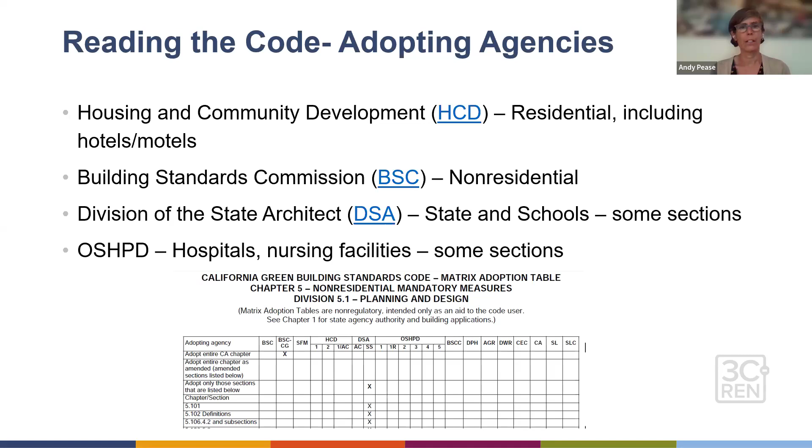CALGreen itself is organized by administration. Definitions are a good reference—they keep those really current. The scope is important as well, we'll touch on that. And then otherwise, the main content is Chapter 4 for residential, Chapter 5 for non-residential. Some more resources, and then the tiers—those reach sections are in the appendices.

So the scope, just so we're making sure we're not doing more or less than what is required: in the residential, all new construction that's residential needs to comply with CALGreen. If you're doing alterations or an addition that adds area or volume, that new part of the construction needs to also be CALGreen compliant. So if you're just messing around on the interior, it doesn't really matter, but if you're adding height or square footage, that does matter. And it only applies to the new work you're doing, unless there's something else in the code that triggers it.

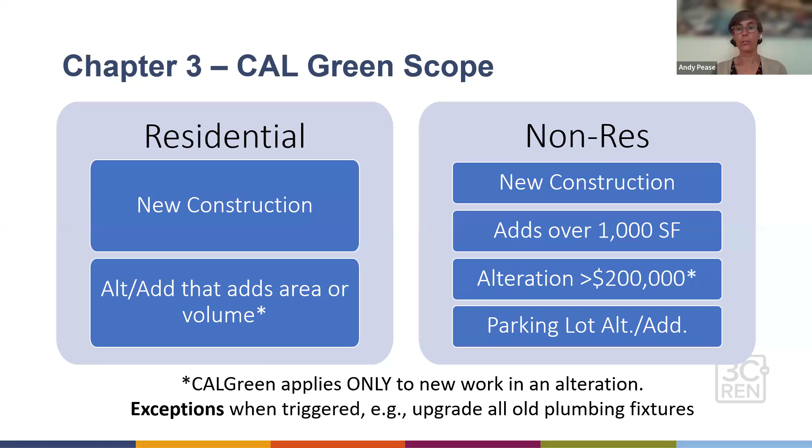And then mixed use, mixed occupancy—each section needs to meet that requirement. It's a little bit tricky if you're doing, say, hotel motels, which are in the residential section. So if you're doing that on a podium with retail down below, then that will need both a residential checklist and a non-residential checklist on your building plan. So you have to comply with both depending on that section. But if you're doing multifamily housing and it just has a community room that's associated with the residence only, that does not trigger a non-res checklist, so you can just do that.

For phased projects, just whatever is within that phase needs to be CALGreen compliant. So for a shell building, you don't have to do all the interior stuff, but once you do the TI, that's still new construction—that first build out of a TI is new construction, and otherwise it's an alteration or addition.

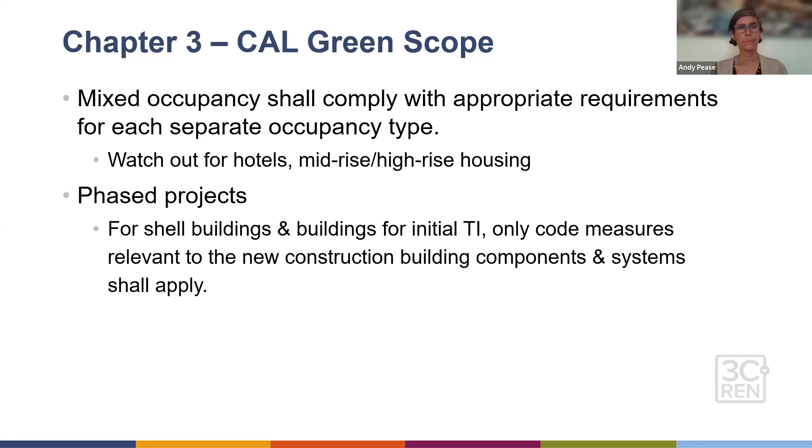And then just big picture showing CALGreen compliance, the best method is to have a checklist on the plans. In-house, we have developed an Excel spreadsheet where we track all of these, and we'll put that on the plan sheet. But there's also this very simple form that the AIA puts out. I don't think they have the 2025 one up and running yet, but I imagine that they will. And so that has all of the code sections, but really important—if you see this blank, it does not count, it doesn't help.

What it has to have is this column with a yes or not applicable. And then if it is a yes, it should show the detail sheet where that thing is referenced. Otherwise, you're just listing the code. So just make sure that there's upfront compliance. And again, you might have one for res and a whole other sheet for non-res.

Okay, we're going to go into mandatory measures. Any chat or questions come in yet, Tatiana?

Yes, there was one question from Claudia asking to confirm: when talking about what someone needs to do, that applies only to jurisdictions that adopt that specific part of Part 11, correct?

Good question. So to clarify, all these mandatory measures are across the state. All jurisdictions have to adopt mandatory measures. In tier 1, tier 2, a jurisdiction can adopt either an entire CALGreen reach code or certain elements. So if CALGreen requires a certain amount of bike parking, a jurisdiction can say we want even more—they can't say we want less. Great question, thank you for that.

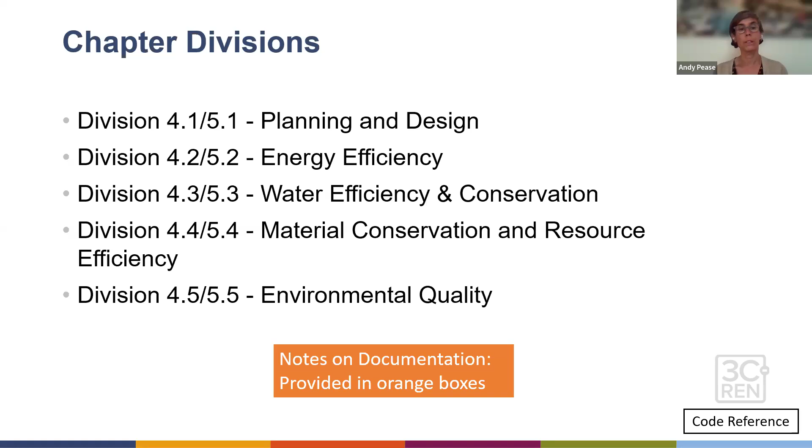Anytime there's a code reference, we'll put that in the bottom corner. And then throughout we have notes in orange boxes about documentation. So if you're a designer, this will help your plan review. If you're a plan reviewer, this can help you know where to look for something, or let folks know this is where you'd like to see it.

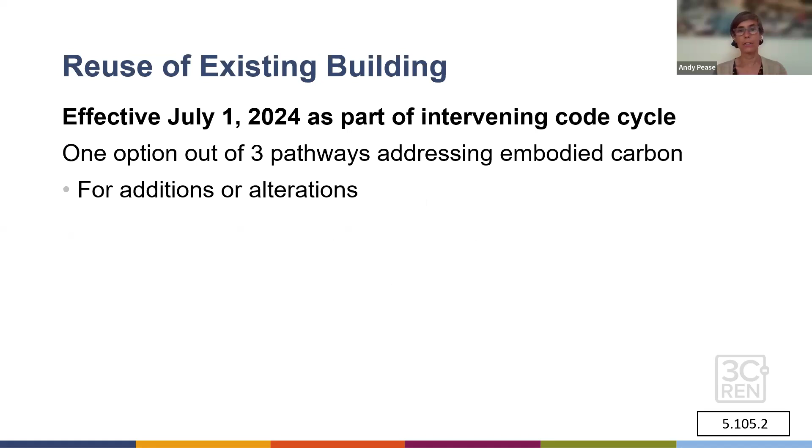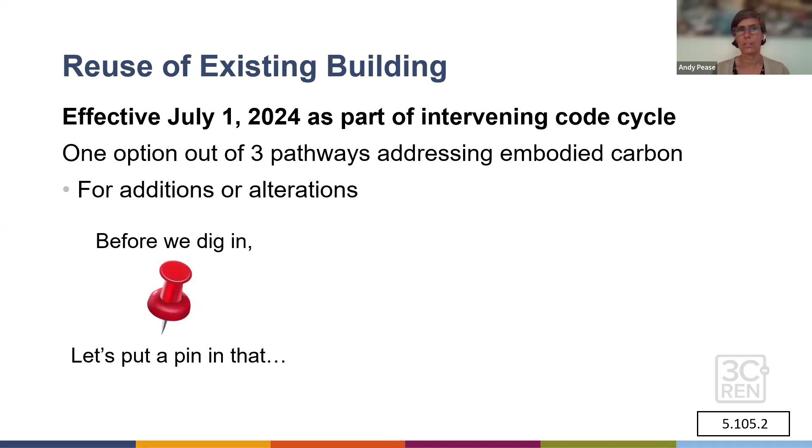Okay, planning and design. The very first thing it starts out with is reuse of existing building. This just came in during the intervening code cycle as a conversation about embodied carbon, but we're going to put a pin in that and talk about all the embodied carbon options when we get to division 4 and materials and resources.

Some of these we're going to go through a little more quickly than others because they're either intuitive or have been part of the code for a long time. Again, you'll get the slides, so if it seems like I skip over some things, you'll have resources, and we'll linger after the class if there's something specific.

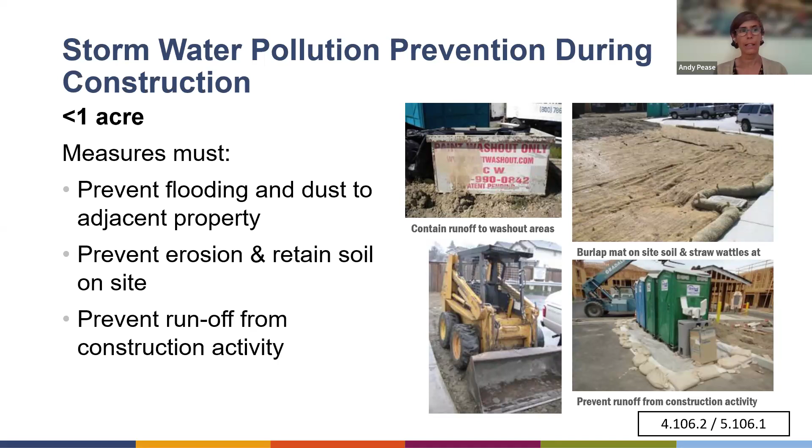Part of this is also just letting you know what's in the scope of CALGreen and where to find it. So, stormwater pollution prevention during construction—pretty standard practice, we're not trying to have erosion and dust. CALGreen spells out how to do that, and for larger projects you're going to get into the NPDES protocols for that.

Documentation should be on the plan set, along with best management practices and regulations as well, monitoring after the fact.

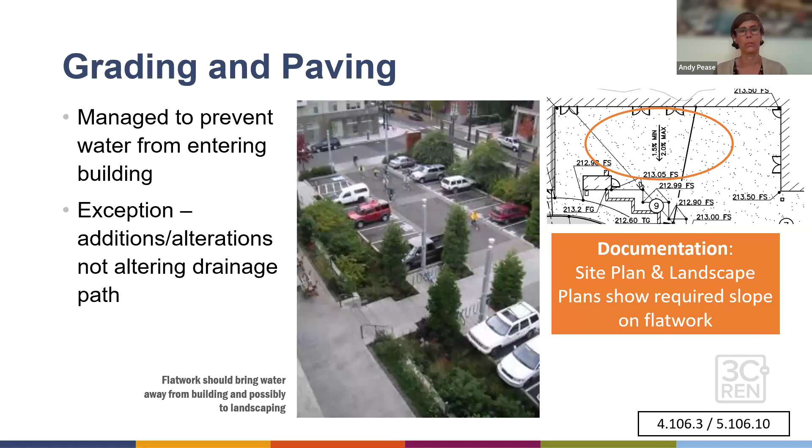Grading and paving should show that it's sloped away from the building—we don't want a bunch of water running in. If you're not changing the paving, you don't have to make this happen, but it's good practice. And it's always nice if drainage from flat work can go into some bioswales, to manage the stormwater on site if that works out.

And then bike parking. Under the current code, non-residential occupancies have requirements for both short-term bike parking, which is for visitors—I'm going into an office, conduct some business, bike in, and there are bike racks relatively close to the entrance and visible; we don't want them tucked away. It's based on how many—there's a minimum of 2.

And if you have a larger parking lot, you kind of have to figure out: if I've got 50 parking spaces, how many of those are approximately for visitors? And then 5% of those need to be short-term bike parking.

Similarly, long-term bike parking—I work at an office, I need a place to put my bike while I'm there for an 8-hour shift. That's required if you have 10 or more occupants, and those spaces are also calculated as a percentage.

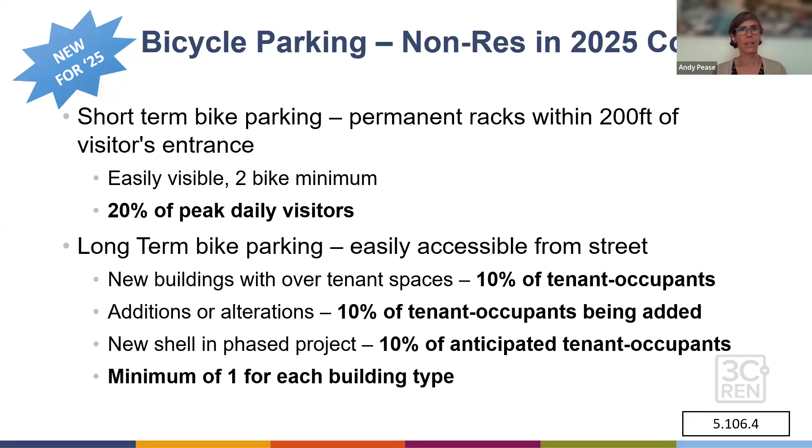Coming up in the new code, a couple of changes here. One is that it was tricky to base bike parking on car parking, so now they're going to switch it to daily visitors. Much better, right? That's helpful if you don't have any parking, to still be able to have bike parking. It will have its own issues as well.

And then they're having a little bit more specificity for the type of building or tenant space. But for long-term parking, there's also a new minimum of 1 long-term parking space for each building type.

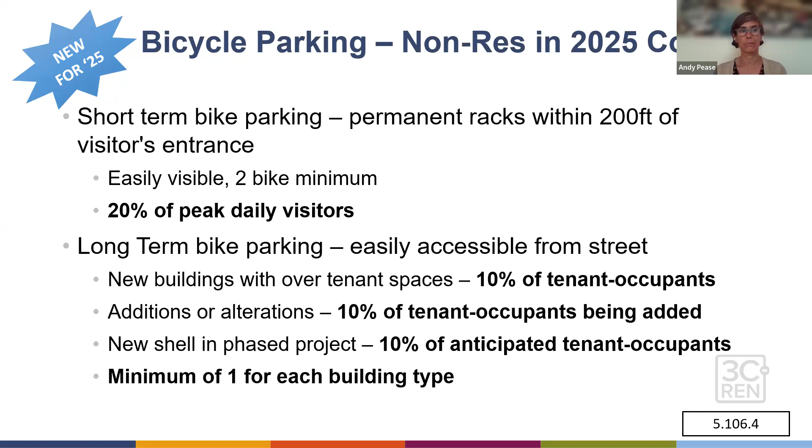Also in the new code, for the first time, we're going to have requirements for bike parking in residential and hotel-motel occupancies. This has been a common reach code for jurisdictions.

So now visitor parking is 1 space for every 10,000 square feet. For long-term bike parking, that's for residents or hotel overnight guests. Residents get 1 parking space for every 2 dwelling units for long-term bike parking, and for a hotel-motel it's based on square footage.

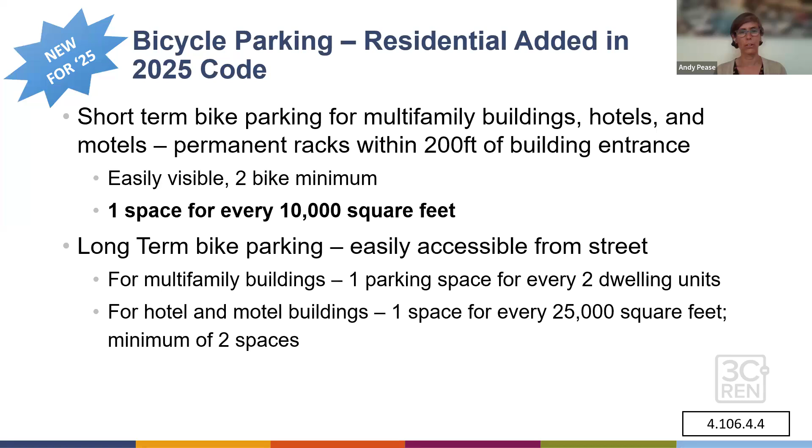And then public schools, as you can imagine, have more bike requirements. That makes a lot of sense. So your plan should show the bike rack type, the location, any details of it, and the calculations on the cover sheet, either based on the current car parking ratio or, in the next cycle, the occupancy count.

So what does that even look like for long-term bike parking? A cage within a parking area, a covered parking area with cages. This one looks like it's in a garage. You can do bike lockers there on the bottom.

The two on the right are probably not compliant, at least the way they are. The top one could be, if it's like a tenant-only locked parking garage. It's a little hard to tell how easily maneuverable it is to get those bikes up onto that rack, so maybe not our best choice, but it could still work. And the bottom one is just not anchored—it's just set on the ground, but maybe you could anchor it and then that one would be compliant.

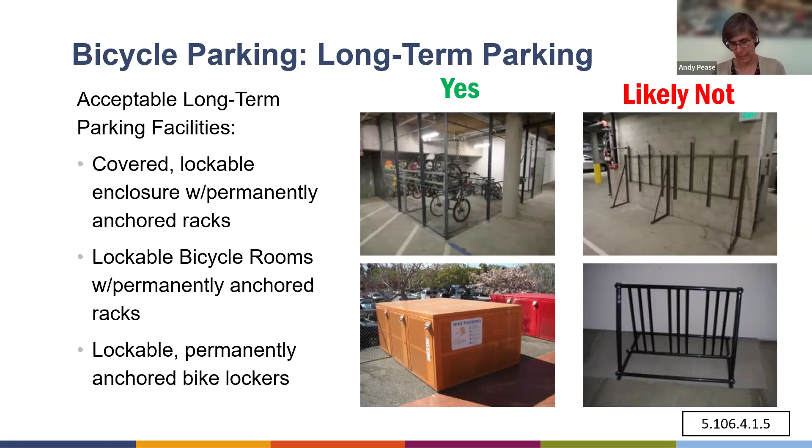Before we move on from bicycle parking, we had one question come in: how do you calculate the number of daily visitors? Right, it's peak daily visitors.

This is a great question because we do this in LEED certification all the time, since it's based on occupancy at the time. So if you change tenants, is that going to trigger an increase in bike racks in the future? But it's your best estimate in talking with them. If you're doing a restaurant, you can kind of count tables and say that's going to be so many visitors. In a retail environment, you might be talking with the owner, or using guidelines that the mechanical engineer might use for occupancy. You wouldn't use the code occupancy maximum, because that's what's legally allowed, but not a reasonable baseline for occupancy.

So there's really not an exact science on that one, but some guidelines are out there. Okay, so a follow up to that.

So documentation would look similar to LEED for peak daily visitors? Yes, I think that's a good way to be thinking about that. And then the number of employees as well, right, counting desks or stations in retail or something like that.

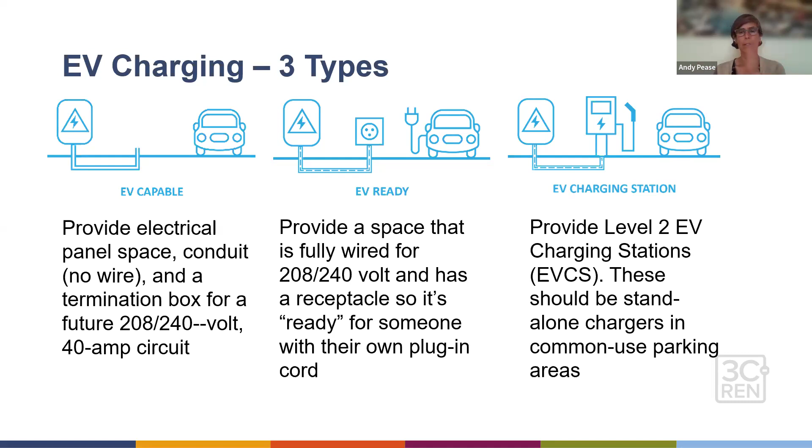And then the third one is the EV charging station. It's a level 2 charging station, and they can meet different requirements. So physically, what that looks like - level 1 is kind of a low plug-in. If you've got a Prius, that's what it comes with. Level 2 is these ones, it's an actual charger. This is what is required - that level 2 with a 40 amp charging station is what is required for level 2.

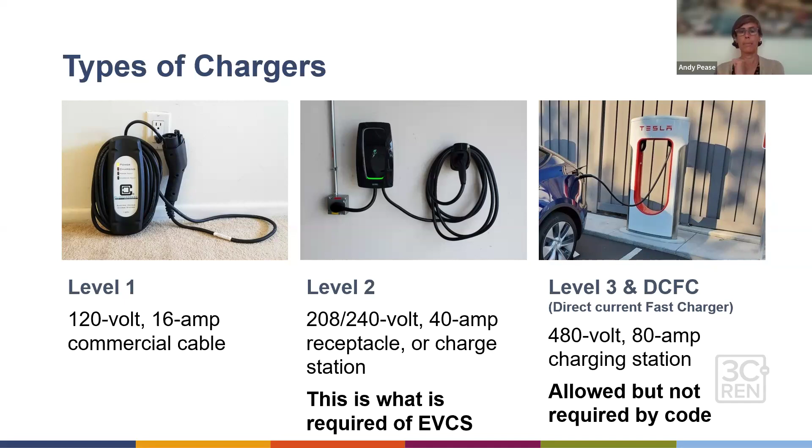And then level 3 is a fast charger. That is not required, but it is allowed for code, and you'll see a little bit later that you can trade up, because you can get through a lot.

So these type 2, there's level 2, there's a couple types. There's the level 2, the 40 amp charge station - you swipe your card, whatever. There's a low power level 2, and this is a 20 amp receptacle that is EV ready. So it is a little bit of a higher amperage than those little tiny trickle chargers of level 1.

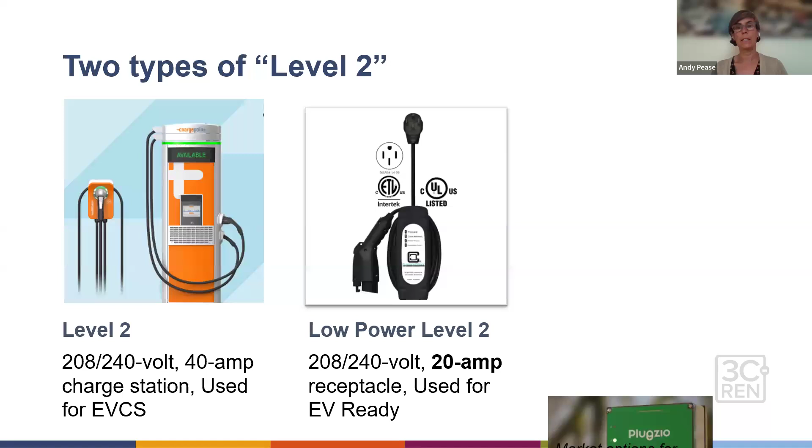Level 2, where it's a charging station, it's obvious how to recoup your money. But just so you know, there's also now options for low power level 2, where you can charge folks for use of the outlet. Plugzio is one of the brands that's now brought this to market.

So single family homes, if you have a 1-2 family, if you have basically your own private garage, you only need EV capable. They didn't want you putting a bunch of infrastructure into empty conduit for somebody who may or may not have an electric vehicle. So it's just having the space available, or you could put in a charger, but the minimum is the conduit and the panel space. The exception is not ADUs or junior accessory dwelling units.

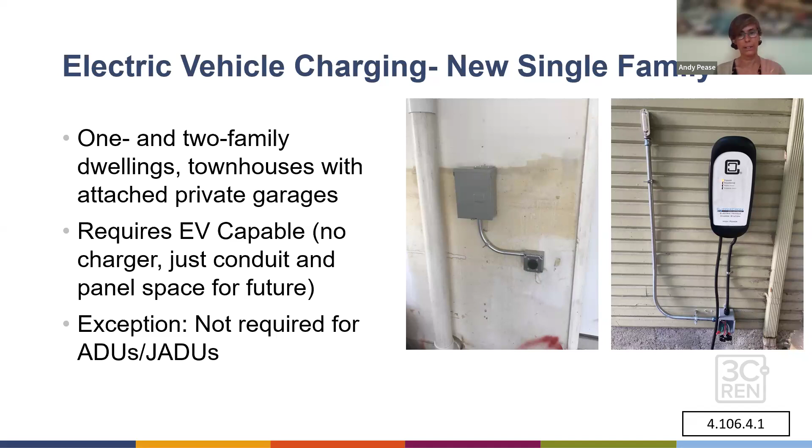Either one, the state doesn't trigger that requirement. If you are doing labeling, so if you have a conduit only situation or marking something as EV capable within the breaker panel, just make sure that you're labeling that something is going to be able to accommodate the EV so it doesn't get lost. And then if you're installing it, you should show electric vehicle charging only. But if it's just conduit or if it's just EV ready, it doesn't need to require that.

Again, this is something I'm just foreseeing in the future, that we're being tighter and tighter on parking requirements. And so if you put in a bunch of charging stations, but only allow people who are charging to use them, there's starting to be competition for parking spaces. So I think this is a conversation we'll be having in the future about how to balance readiness in a small parking lot.

Okay, so for multifamily and hotels, motels, in the current code, at the intervening code cycle, they totally bumped it up. But hotel motels were still together. And that 40% in the current code have to be low power level 2 EV charging receptacles - so of all the parking spaces, 40%. An additional 10% should be the actual level 2 chargers, right, the 40 amp charging equipment.

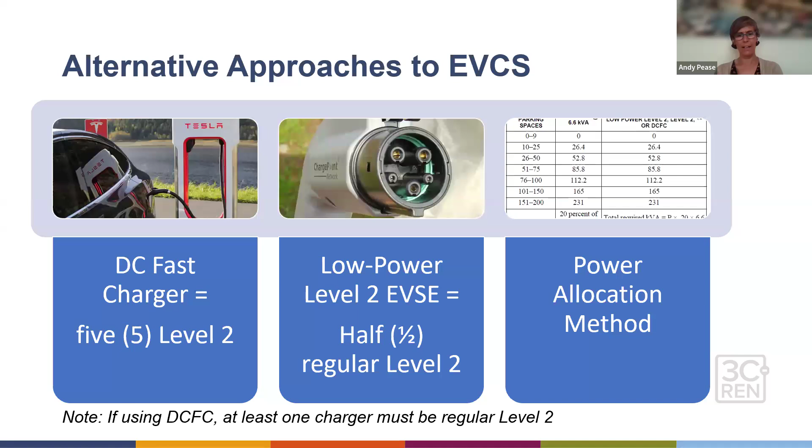There's also a power allocation method. I haven't really worked with that yet, but I think it's a nice way to mix and match to accommodate. If you are using fast chargers, at least one has to remain regular level 2 — you can't swap out all of them for fast chargers.

Access compliance is a whole different building code section, but there's a little overlap here. Within the California Building Code, Chapter 11B talks about requirements for charging electric vehicles. As soon as you put in electric vehicle charging equipment, not just outlets but the actual equipment, it has to be van accessible.

Minimum of one has to be van accessible, then it goes to ratios. It does not count toward the accessible parking required for the occupancy itself. So if you're already required to do 2 accessible spaces, then you add a charging station, that one also needs to be accessible — they can't overlap. More conversations we're going to have in the future.

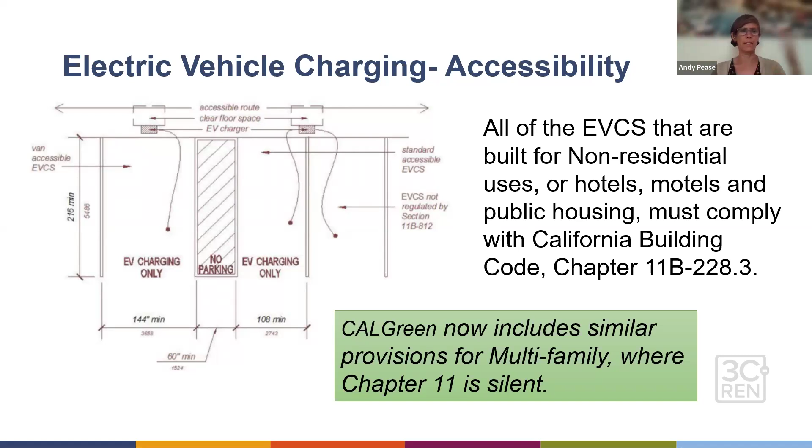Interestingly, because Chapter 11B in the CBC doesn't include multifamily access compliance, CalGreen has it in there for now. It looks almost identical in terms of the aisle, the space, and the access, but basically everybody now, if you're putting in charging stations, they have to be accessible.

And then for trucks, if you're doing medium and heavy duty truck access, you don't have to install charging, but they want to make sure grocery stores, etc., have electric capacity to add charging for electric hauling vehicles in the future. It started out with just grocery and warehouse, and then they've added office buildings, retail — all those folks are going to need that.

Yeah, so that off-street charging can become viable. And then public schools, community colleges — same approach, but just a different table.

And then, as it has come around, if you are tearing up a parking lot to put in new lighting, it is going to trigger the CalGreen sections for that. Depending on the current code, it's a percentage; with the new code, everything you're messing with needs to be brought up as close as you can to what you're disturbing.

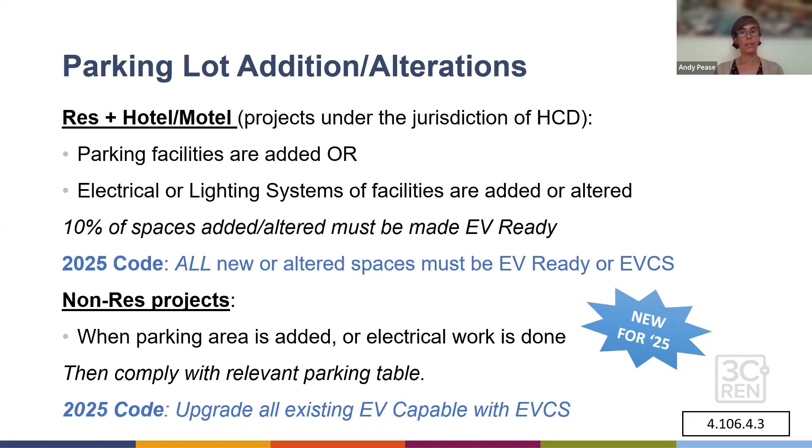That is it, and then finally, documentation — lots of calculations, or at least strategic calculations, so the plan reviewer knows exactly what it is you're working on. There should also be alignment between your electrical plans and your site plans.

There are 2 different ways to communicate. One is to show if a spot is EV ready, which you can just label like the top one. But if you're trying to show the builder what to build, you can actually show what the striping is on the parking space. So those are 2 different documentation types, which may or may not be on the same building plan — probably easier to put one on an architectural site plan and the other in the civil.

All right, Tatiana, I'm ready. Some of this you might have touched on, but we can kind of cover that.

So first is, how is EV Ready expected to work in multifamily when there is no easy way to meter individual outlets on a large scale? Is it allowed for EV Ready outlets to be locked off during occupancy, in anticipation of a future installed EVCS, when requested by a tenant?

I think the solution that we have right now is the outlet kind of scenario we talked about, until requested by the tenants to have it unlocked. I suppose if there are assigned parking spaces, either way you should be able to charge, either for an outlet or charging equipment. That's what all of us, if you're driving an electric vehicle, are used to with ChargePoint, Electrify America, EVgo, whatever - we're used to paying for that. So if you can't charge it to the tenant, you should be able to charge either the outlet or the charger. The code doesn't say you can't do that. So that's what folks are doing.

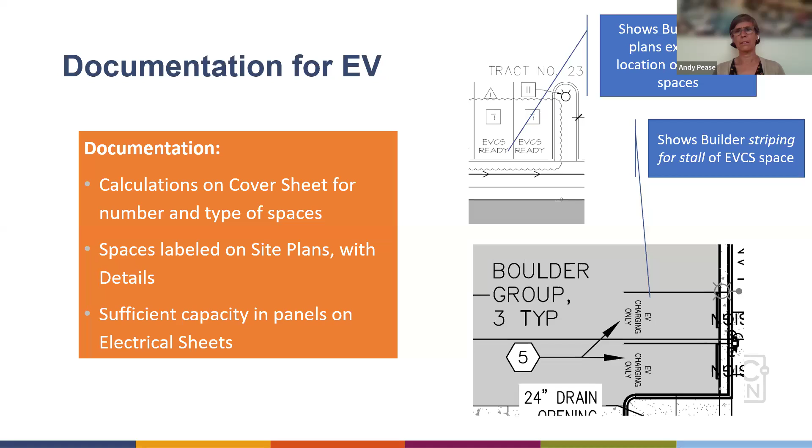All right, I think we better keep going unless there's one last urgent one. I think you're good to keep going. Okay, if we have time at the end we'll pick up some of those loose ends.

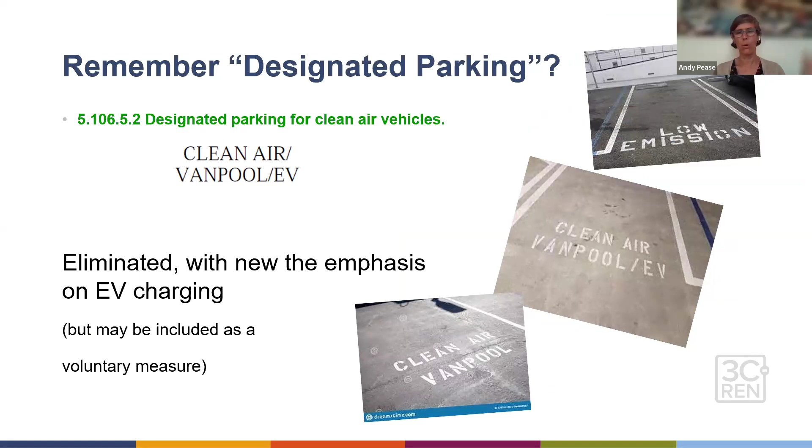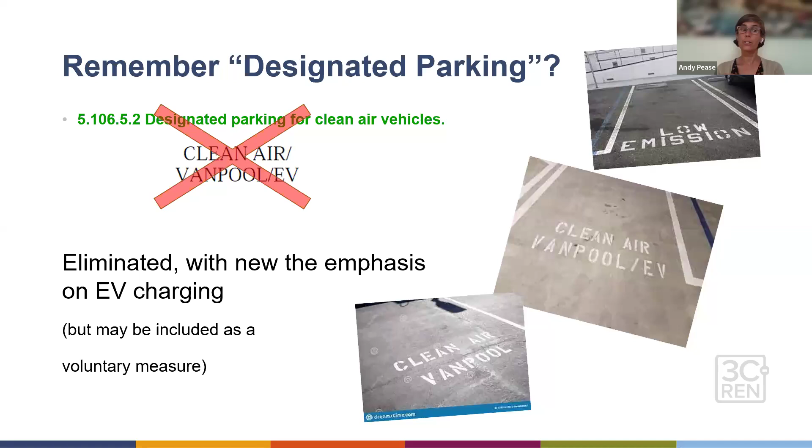Great question. And for folks who have been doing this a while, before we were adding all this infrastructure there was this clean air, van pool, EV preferred parking thing. That thing is all gone, we don't do that anymore. It is in the tiers as a voluntary measure, but otherwise, in general, you won't see those kinds of designations.

All right, just a few more in the site category - our biggest one, the planning side. That has the most, just light pollution, right? This has been around for a while. You can do backlight, uplight, glare, or local ordinance, but there are energy code exceptions. They used to conflict, but a couple code cycles ago they got in alignment. So if you have something with small lumens, it's just not that bright in the first place, you don't have to do the documentation for the bug rating, but do provide a lighting schedule on the site. If you are doing bug ratings, you've got to show the property line and the distance to the property line, and just make sure you're showing all of that. And then if you're doing schools, shade trees are required.

Very cool. All right, energy efficiency - there, like we said, it does overlap with the energy code. Must comply with Title 24, Part 6. That's it, that's all you've got really. And then we go to water. All right, with that, I'll catch a breath, and Tatiana.

Thanks, Andy. So the requirements for fixtures and fittings are pretty straightforward. You're probably familiar with this already. This chart shows the allowed flush or flow rates in gallons per minute, gallons per flush, or gallons per cycle.

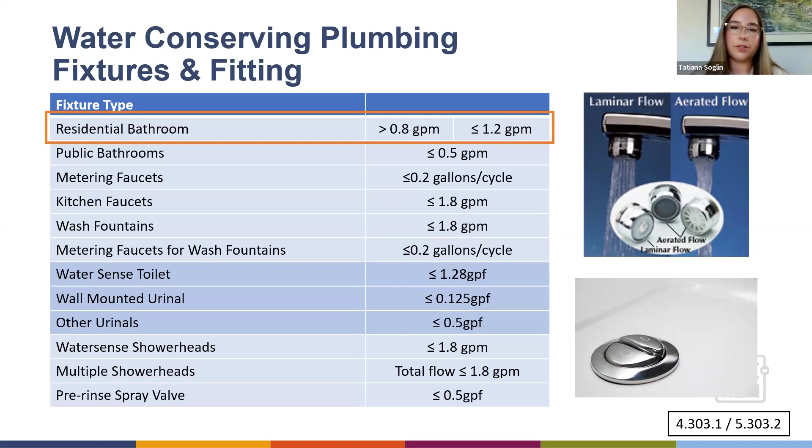An important thing to pay attention to here are things like water sense labels for toilets and shower heads. Another thing to note is that residential bathrooms have a maximum of 1.2 gallons per minute, but they're also the only fixture with a minimum rate of 0.8. Sometimes in mixed-use buildings there will be a blanket 0.5 GPM faucet put in for all the lavatory faucets, but that doesn't meet the minimum for residential, so we want to make sure we're hitting that threshold in those spaces.

There are CALGreen mandatory measures related to water submeters. We put together this decision tree to help you determine whether submeters are required depending on your project and water usage. For non-residential projects, a new construction project or an addition over 50,000 square feet needs a submeter if you have a use over 100 gallons per day.

If it is less than 50,000 square feet, it doesn't need a submeter unless you have a use that is considered excessive. CalGreen categorizes excessive consumption as a use over 1,000 gallons per day. That could be something like a building with multiple tenants, and there's a use like a restaurant or a laundromat. In those cases, you would need a submeter.

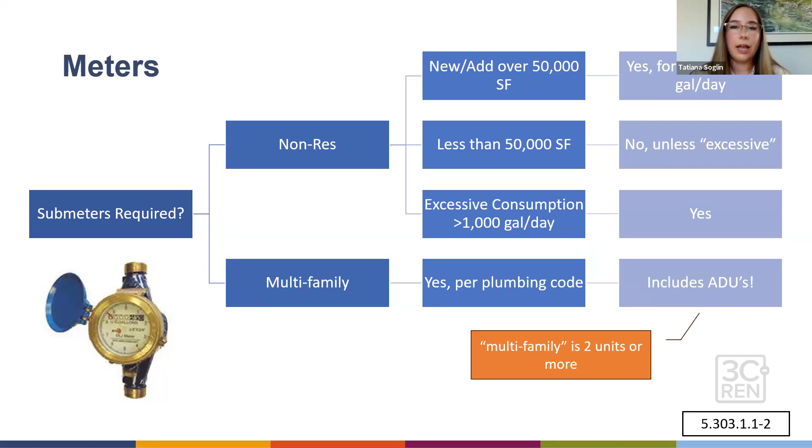For multifamily, all units must be submetered per the plumbing code, and this also includes ADUs. As a reminder, projects are considered multifamily if there are 2 or more units. So each unit needs separate submeters, and this helps with accountability for water use and for billing.

Food waste disposers also have a maximum threshold. They must be less than 1 gallon per minute when not in use, or have an automatic shutoff after 10 minutes of inactivity. And they must be less than 8 gallons per minute when in use. All of this will need to be included in the fixture schedule.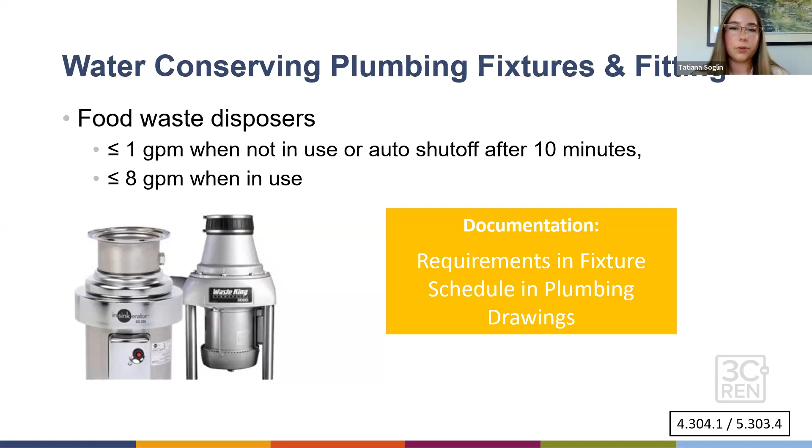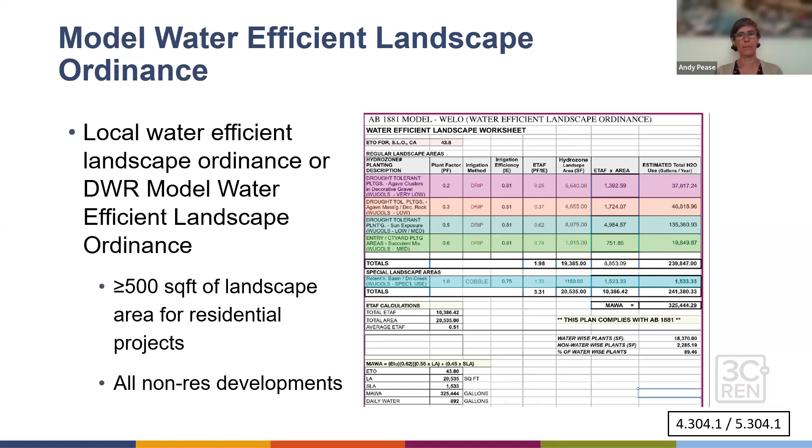This will be somewhere on the landscape plans. A lot of times we see it either with the irrigation plan or the planting plan. We also see more enforcement that the landscape plans need to be included with the permit, because a lot of times folks would say, oh, we're not doing landscaping now, and then they would do landscaping later but not run it through the permit process, so they wouldn't do these calculations. So it is important to have full landscape design and drawings as part of the permit.

For special uses, MWELO is required for public schools and community colleges where there are 500 square feet of newly constructed landscape projects or 2,500 square feet of rehabilitated landscape projects, and healthcare facilities must comply as well.

All right, and I think I'm passing it back to Andy. All right, yep.

So some other requirements as we get into the materials section. A lot of this is about the durability of the project, because as things decay, then there's also mold, and that impacts health. And so there is rodent proofing.

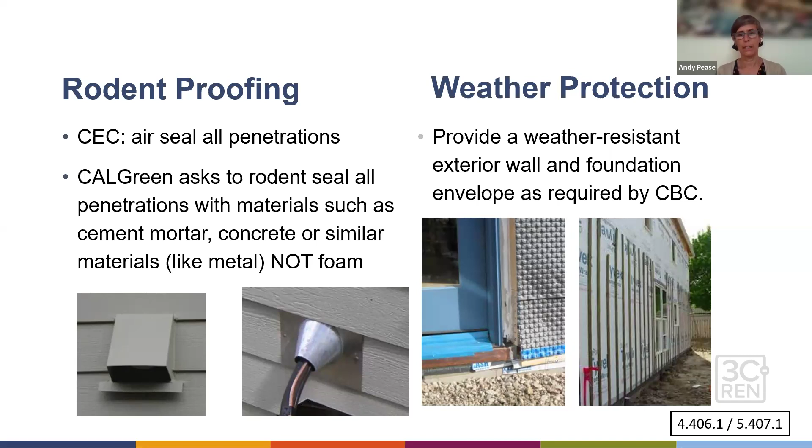CalGreen says, look, don't just use foam to seal up an opening. It needs to be something cementitious or metal. And then make sure that you have a weather resistant foundation, so you're not setting any wood or something in that could come in contact with the dirt.

Don't let the sprinklers get on your building, because that's a convenient way to get a lot of water into a wall assembly. And then exterior openings in non-residential settings should have both flashing of the drainage plane, but also the primary doors need to have non-absorbent materials right at the entry, and it has to have an awning or an overhang or recess so that the door has at least 4 feet of protection from rain.

So that's... but staff entrances, even though it's not the primary entrance, well, it's primary for a lot of people, so it's going to get opened and closed. If it's emergency exit only, then no, that wouldn't require it.

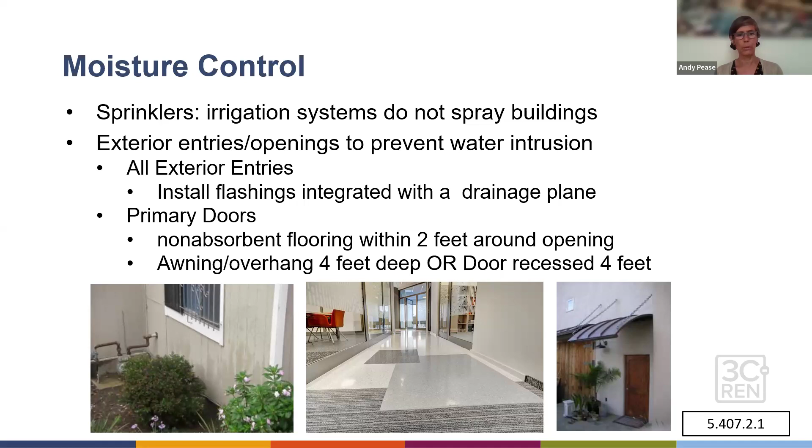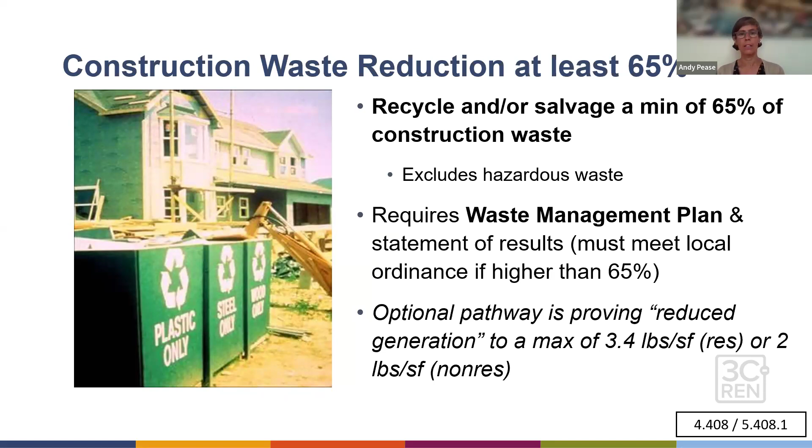Construction waste reduction is currently at 65%. It had been 50%, now held at 65%. This is challenging in terms of recycling markets, etc. It does require a waste management plan, and then there's an optional pathway to reduce the generation of waste in the first place, so you don't have to worry about waste diversion if you just don't make much waste to begin with. This is pretty challenging unless you're doing modular construction or panel construction or something like that - then you'd really have a lot less waste generated.

If you're doing an addition or alteration, you must address what they call universal waste - household hazardous waste, things like lamps, ballasts, and thermostats - they need to be disposed of properly. And of course, clearing debris and plants, all of those things must be 100% recycled.

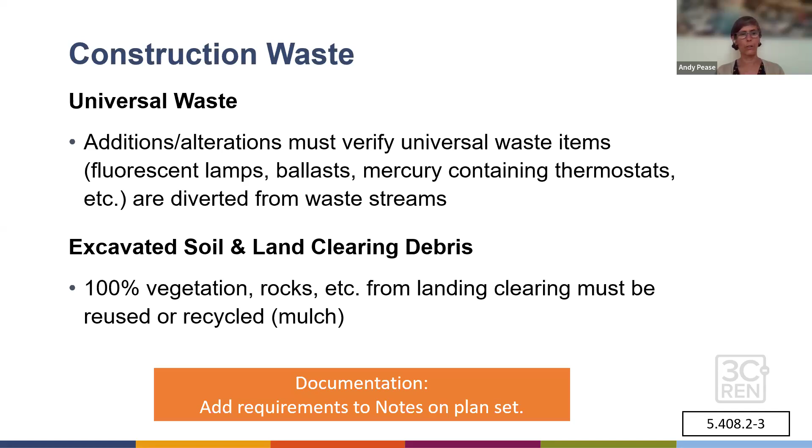And now, embodied carbon. Back to Tatiana. Effective July 1st of last year, it is now required as part of CALGreen code to address embodied carbon on non-residential projects 100,000 square feet or more, or schools under jurisdiction of DSA 50,000 square feet or more. This will reduce on January 1st, 2026 to 50,000 square feet for all non-residential projects under the 2025 code cycle.

There are 3 pathways to compliance, and we will briefly walk you through each of these: building reuse, life cycle analysis, and the prescriptive pathway. To understand each option, we need to know what embodied carbon is, where it shows up in the construction process, and the scope for looking at each pathway.

Embodied carbon refers to the greenhouse gas emissions arising from the manufacturing, transportation, installation, maintenance, and disposal of building materials. We don't want to confuse this with operational carbon, which relates to greenhouse gas emissions due to building energy consumption - the type of carbon emissions you're probably more used to hearing about. You may have seen a chart showing where you'll find carbon in the construction process, and the terms at the bottom help us determine the scope of which stages we want to look at.

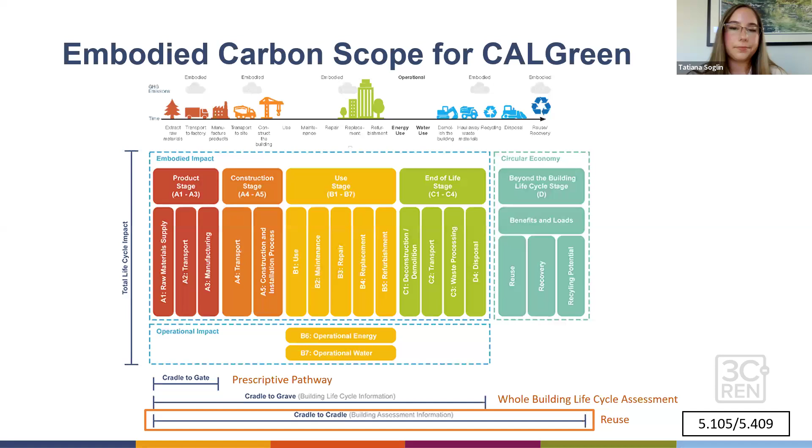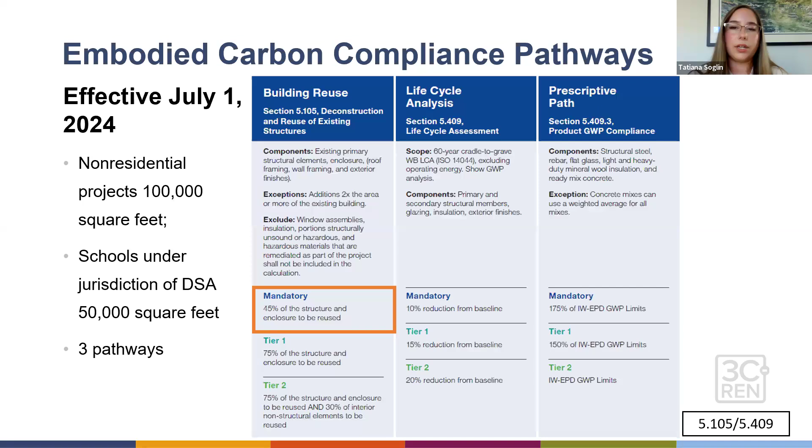Looking at a more detailed overview, we have our building reuse option for additions, where the addition is less than 2 times the area of the existing building. The mandatory measure requires 45% of the structure and enclosure to be reused. Next is the whole building life cycle analysis - this is the modeling pathway where you'll need to show a 10% reduction in embodied carbon from a baseline building.

Last is the prescriptive path, which targets carbon reductions in specific materials. For the mandatory measure, this limits the global warming potential to 175% of the industry-wide average from environmental product declarations, or EPDs.

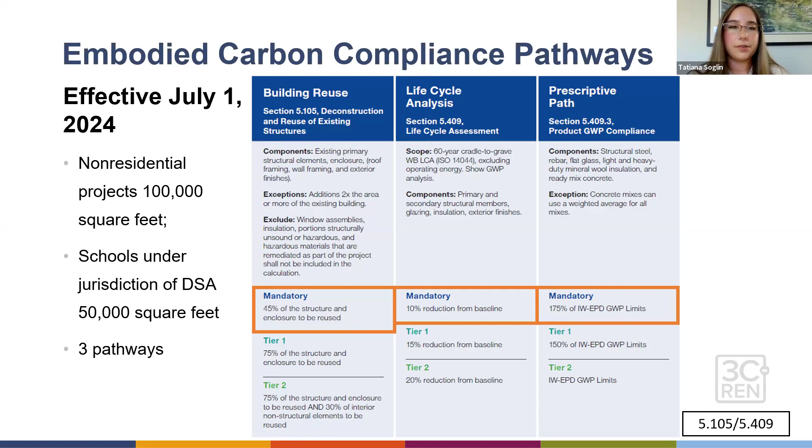So we'll run through a quick example. This is an example of documenting the reuse of an existing building pathway. Again, this method's for additions or alterations where the addition is less than 2 times the area of the existing building. For this example, we have a 45,000 square foot existing building and an 80,000 square foot addition. This method targets primary structural elements and building enclosure materials, as seen on the bottom left, excluding hazardous materials as well as windows and insulation - that's to encourage replacing windows and insulation with higher performing materials.

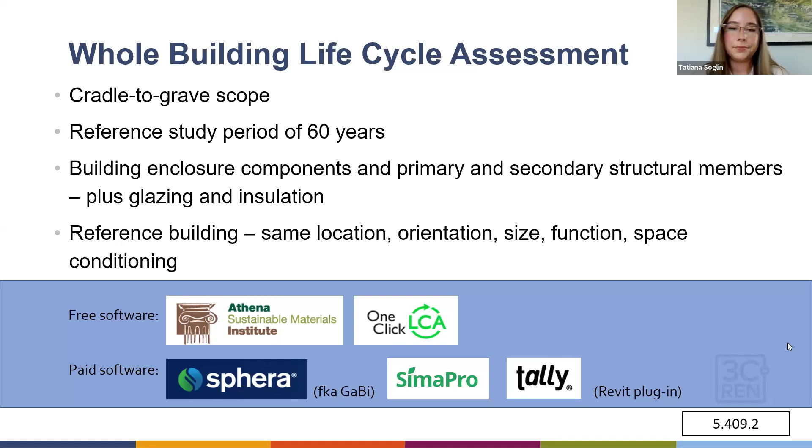It calculates a bill of materials and the associated environmental impacts for you. Users have the flexibility to add materials as needed or import your own bill of materials from any CAD program.

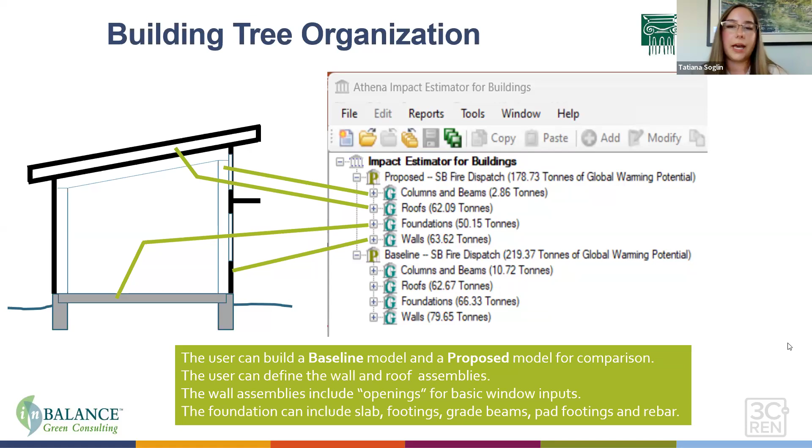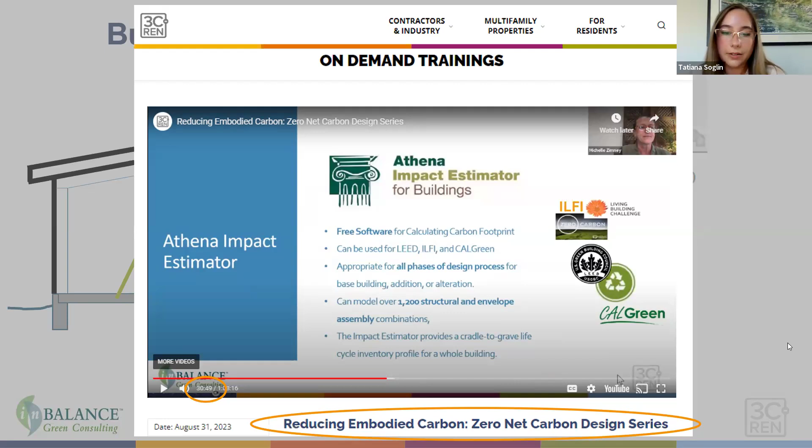We have another presentation that's much more in-depth, digging into the weeds on how to use Athena, and that can be found on the 3CREN website as part 4 of our previous ZNCD series. The Athena portion starts at about minute 30, and I'll drop that link into the chat so it can be referenced.

The last of the 3 pathways for embodied carbon CALGreen compliance is the prescriptive path. This method has a much more limited scope, targeting some higher impact materials determined by the Buy Clean California program—things like certain types of steel, glass, and insulation, and of course, concrete.

This table shows the maximum acceptable global warming potential, or GWP, which is based off of industry-wide averages. For the products on the top half of the chart, you just need to find products with a GWP below what is allowed. For concrete on the bottom half, compliance is determined by a weighted calculation.

Each type of concrete has a different allowed GWP value and will have a different actual GWP. So to determine compliance, you'll follow the equation: multiply each actual GWP with the volume used, add those together to get the total carbon impact, then do the same for GWP allowed, and just make sure the actual GWP is lower than the allowed.

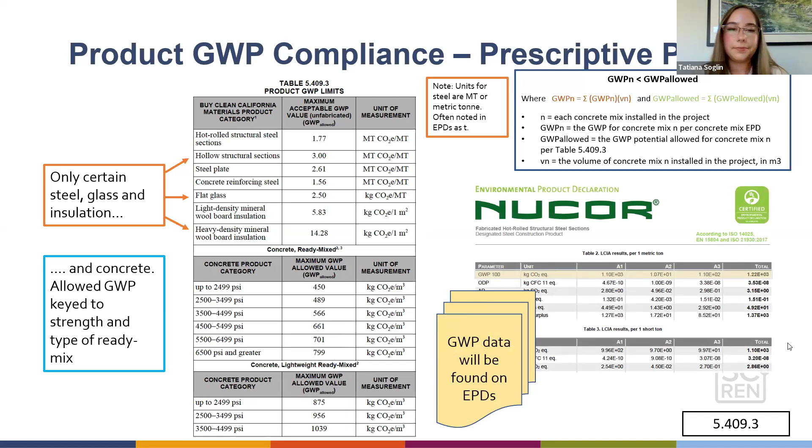So most of us are probably not working on 100,000 square foot buildings where the embodied carbon requirement is triggered by code. But as we mentioned earlier, the square footage threshold will be reducing to 50,000 square feet in 2026. Over time, we can expect it to become more relevant to a wider variety of projects.

So we want to start thinking more about strategies and addressing embodied carbon now, so you can start implementing some of this, and when it is required for your projects, you'll already be more familiar with it. This slide has a lot of information—I'm not going to go into depth on each one.

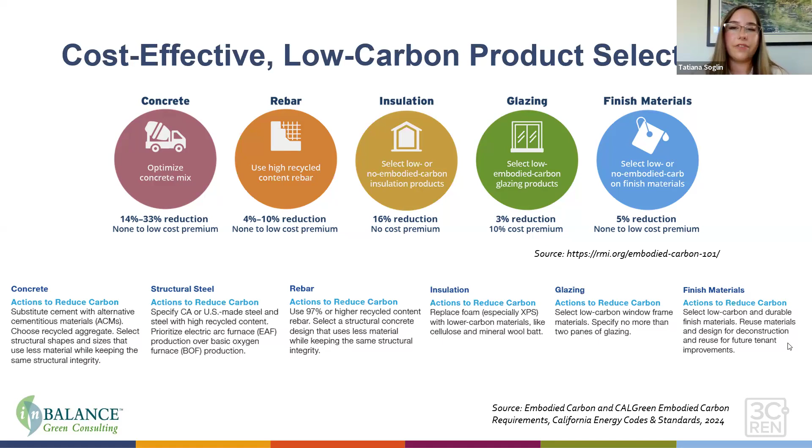We can see that the emissions vary greatly. Foam materials tend to be pretty common and are among the highest in carbon emissions. Mineral wool is even still net emitting, though lower than foam, and fiberglass batts are a bit lower. Switching to non-petroleum products such as cellulose, hempcrete, and straw bale, you're moving more towards sequestering carbon instead of emitting.

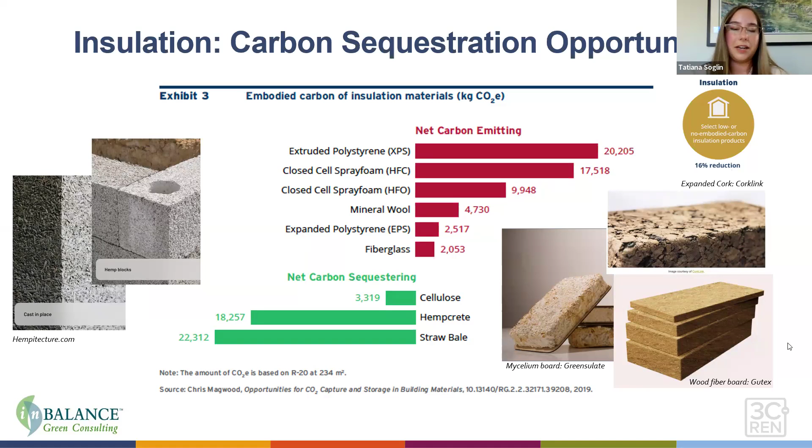And we have some other examples to the right of expanded cork, wood fiberboard, and there's even emerging technologies like mycelium board, which is made out of mushrooms. So we see insulation has a lot of options for material replacements, and there are always new things coming along. That's an interesting one to kind of keep tabs on, what's emerging.

Again, we have a lot more information on embodied carbon in particular, really going much more into depth on each of these embodied carbon strategies and more on sequestration. That presentation is also available for free on demand on the 3C-REN website, and I will drop the link to that one in the chat.

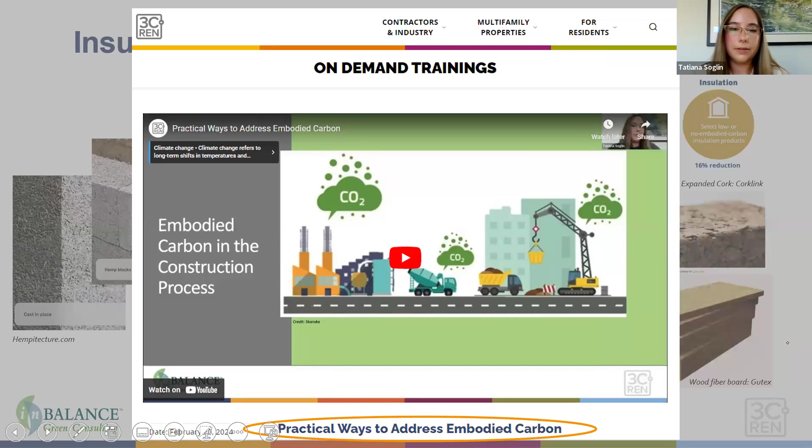Finishing up the materials section, there is an operation and maintenance manual requirement. This can be a little binder, it can be a cloud-based something, but CALGreen has very specific requirements for what needs to go into a homeowner's manual. If you think about it, a toothbrush has more instructions than a house a lot of the time when you buy it. So all the warranties, appliances, maintenance schedule, the value of downspouts, all those things.

And then they added last cycle defensible space, also how to recycle, how to get incentives, energy efficiency. In the non-residential world, commissioning is required by CALGreen, and that is a process that can help produce these O&M manuals for non-residential. So that should be documented on the plans that this is a requirement, because it often gets forgotten at the end, and then inspectors can ask to see evidence of it.

There needs to be space to do the recycling in the first place, and just as California increases the requirements for recycling, diverting organic waste, just make sure that you're designing spaces that can accommodate landfill, recycling, and organics for landscaping and food waste.

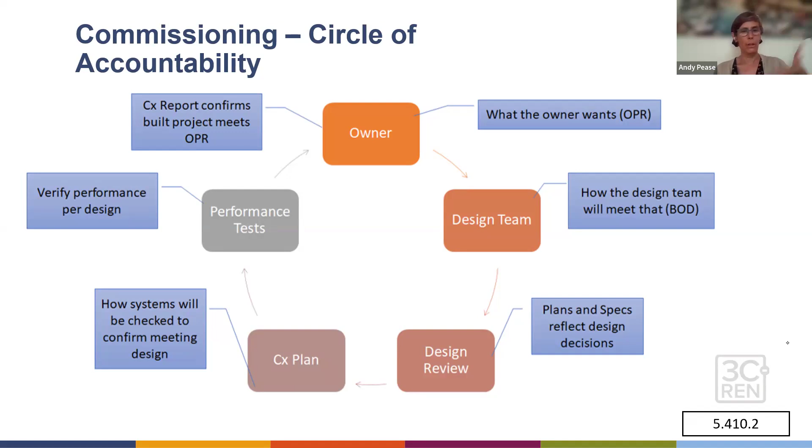Within the building permit process, these first requirements, the first 4 are all part of the permit plan for new construction, new residential building or non-residential building over 10,000 square feet, unless it's a storage building. But otherwise, pretty much any conditioned space is going to need the OPR, BOD, commissioning plan, and the requirements in the documents. The rest of it happens during construction, but again, can be requested by the inspector at the end to get the testing, the documentation.

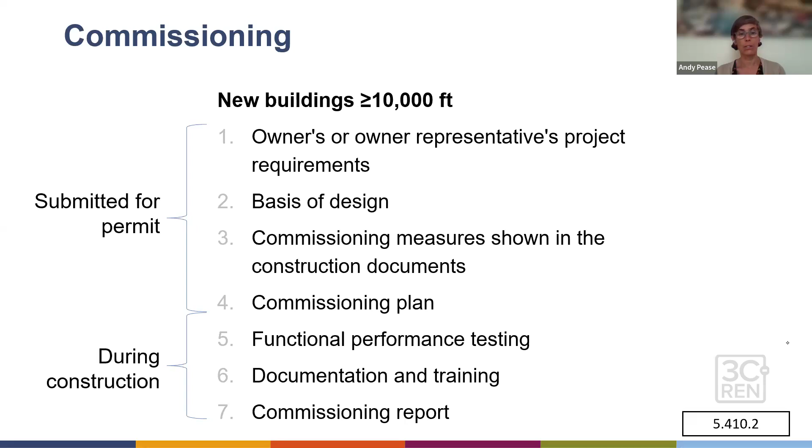Training is required, and then the commissioning report. The Energy Code has a nifty form for this, form fillable that you can fill out. Note that there are some specific differences. Commissioning for Title 24, Part 6, the Energy Code requires some parts commissioning light for projects that are under 10,000 square feet. There still needs to be a design review. So this form is required for non-residential projects under the Energy Code. Also, CALGreen adds irrigation and PV as part of commissioning, which Energy Code does not.

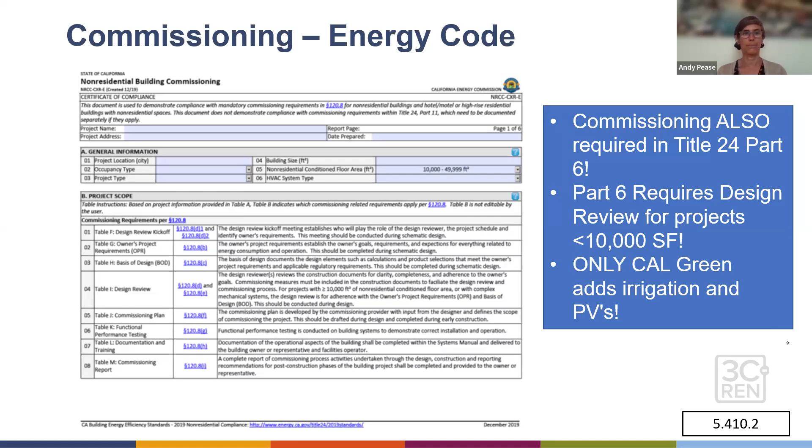For projects under 10,000 square feet, there's still a formal testing and adjusting process, so your engineer should be developing and describing a process for testing the system to make sure it's going to work, but it doesn't have that whole OPR commissioning plan type of thing. And there is a reporting requirement for that as well.

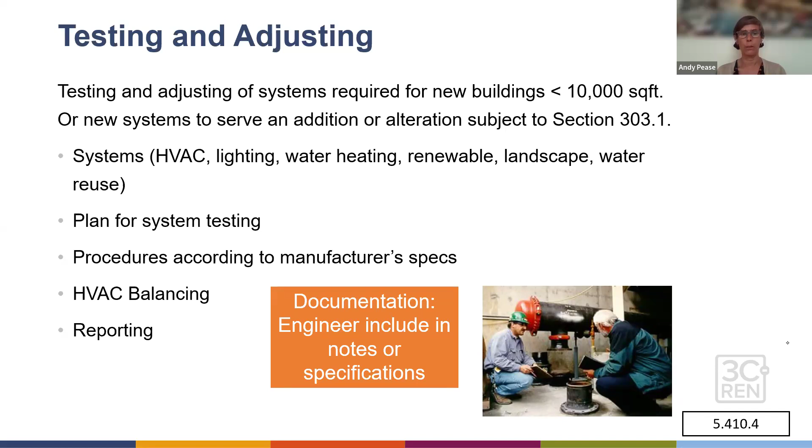Tatiana, any pressing questions we need to catch up on before I jump in?

Okay, last of the major categories here. Again, you can't have open combustion—it's California, come on. For temporary ventilation, current code is MERV 8, and then you go to MERV 13 for permanent. But next cycle, the temporary air filters must be MERV 13 as well. And these are fat, so make sure you take those into account.

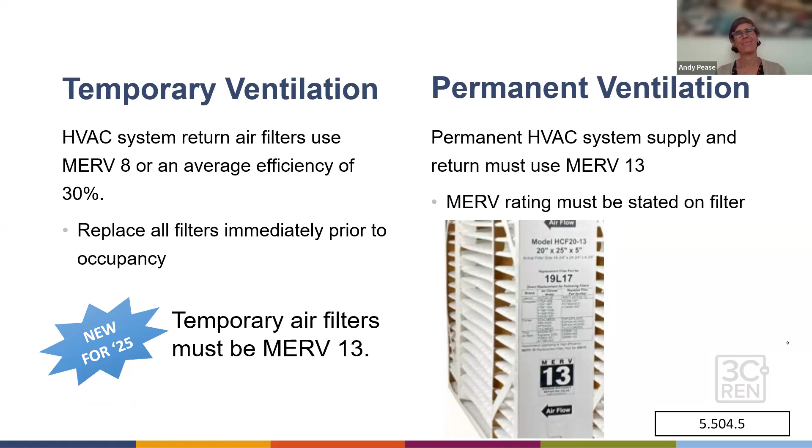Ideally the ducts come in with their ends covered, then they're installed, open while they're working on it, then they cover it again, and if they get ripped open, you cover it again, right? Because otherwise what happens—like if they're sanding the drywall, that little bit of dust gets in, the dust settles, gets dampness, and that's how you get mold growth.

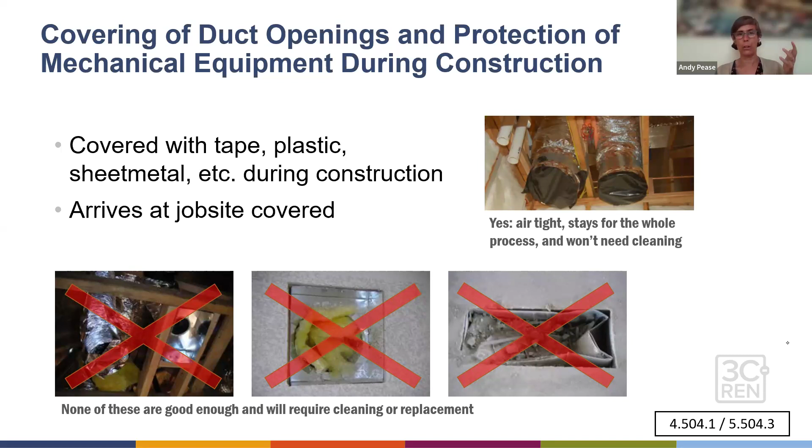So if by chance a duct is left open and gets dusty, there are cleaning protocols. It's not like you have to tear it out, but you do have to clean it, because we don't want that mold growth in our ducts.

Pollutant control—thankfully this has been on the books quite a while in terms of adhesives, sealants, carpets, resilient flooring, paints and coatings, composite wood like MDF, plywood, OSB, oriented strand board. So all of those things have had requirements for a long time. Most of the stuff on the market is going to be compliant with these VOC limits, and the VOC limits have not changed for a decade or more.

The thing you have to be careful about is sometimes outdoor-rated products get moved inside. Inside products are usually pretty good, but one time we had somebody tack down carpet with this really industrial material intended for outdoor applications, and they just used it to tack down carpet. So that was a problem—those are the things to look out for.

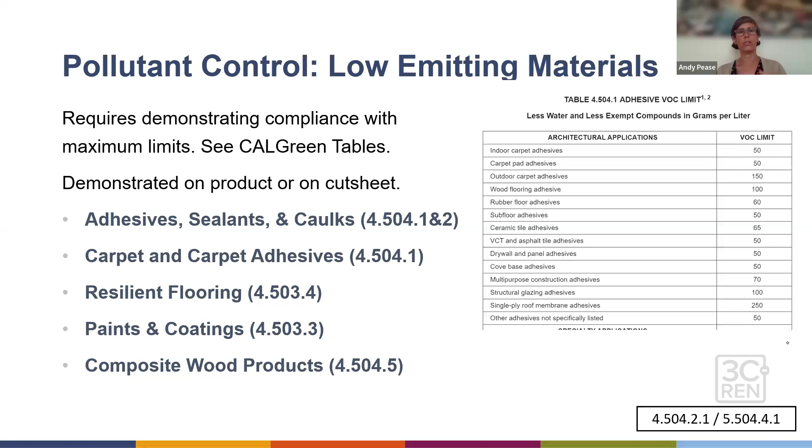This current code cycle, they've added insulation, ceiling tiles, and wall panels—all need to be in that low emitting category. You can actually look at the specific VOC, but there's also this certificate of compliance method, which is a convenient way, especially for products other than paints—well even paints too—if you can get a compliance document showing it meets GREENGUARD or some of these other standards, that is helpful.

Okay, no smoking. So no smoking within 25 feet of building entries, outdoor air intakes, operable windows for buildings, and of course inside buildings. So if you have a no-smoking campus—nobody's allowed to smoke on site—that's fine. Or you can also do a designated smoking area that is 25 feet away from the building.

But if you're just kind of leaving it to chance, you really should have signage, because otherwise people just step outside and start to smoke, or go around the corner and smoke or vape, either one, and then there's an operable window or air intake nearby. So just have your signage line up with the actual conditions. It's shocking to us how often the signage falls short in terms of what's allowed or not—so, 25 feet.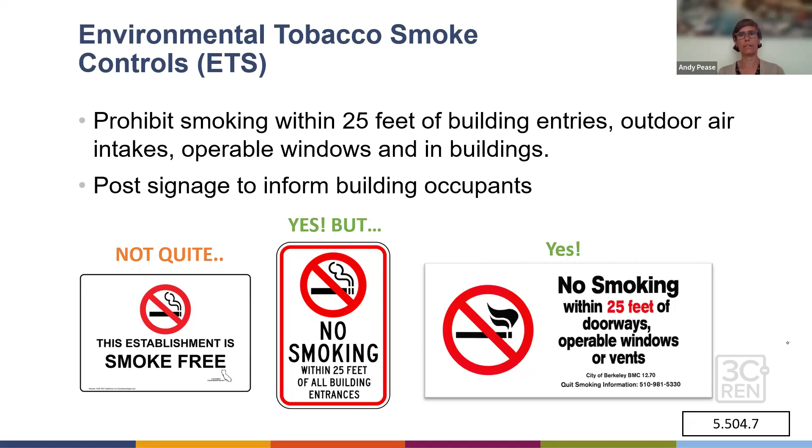And then a few other construction items: capillary breaks for your concrete, vapor barriers, making sure that the one on the left doesn't have either a vapor barrier or capillary break, so we're able to have the vapor retarder that's all taped off and sealed. This is so we're not getting moisture that weeps up through the slab and rots under the flooring.

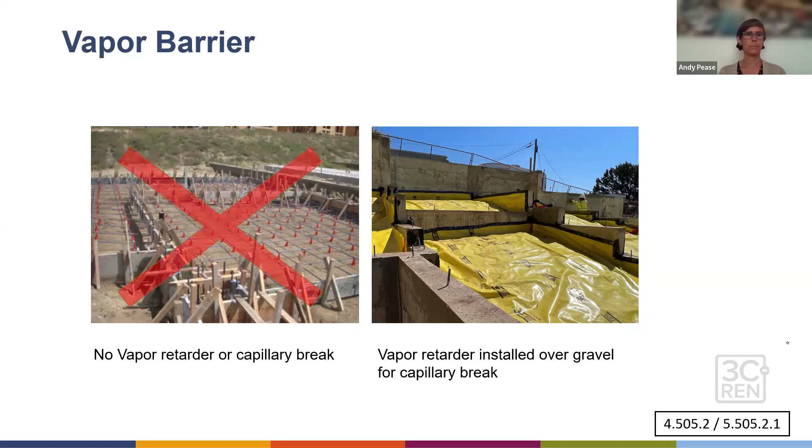That is nasty. Moisture content of buildings - there are little moisture meters you can plug in to make sure that, whether from environmental exposure or just being too young, it hasn't been properly dried. You don't want to close up a wall that's wet, so inspectors or whoever's doing your field verification can make sure that isn't the case.

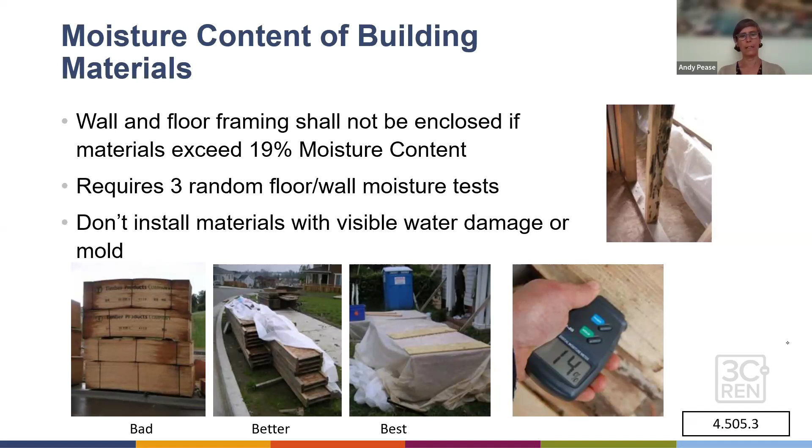And then of course, protect the materials when they're delivered on site. You don't want them actively getting wet - a little bit wet is one thing, but just close them up altogether, or better yet, keep them indoors until they're needed.

CALGreen does talk about the exhaust fan. There's also lots of energy requirements about fans and indoor air quality in the energy code, but in terms of bathroom fans for residential, it needs to be ducted to the exterior and Energy Star compliant. You can do a whole house ventilation system that's ducted, but you still need to be able to have anything with a shower or tub addressed.

So if it's just a half bath, you don't have to do this humidistat requirement, which is triggered by relative humidity. You can't just open a window - well, you can open a window, but you can't meet the code by just opening a window.

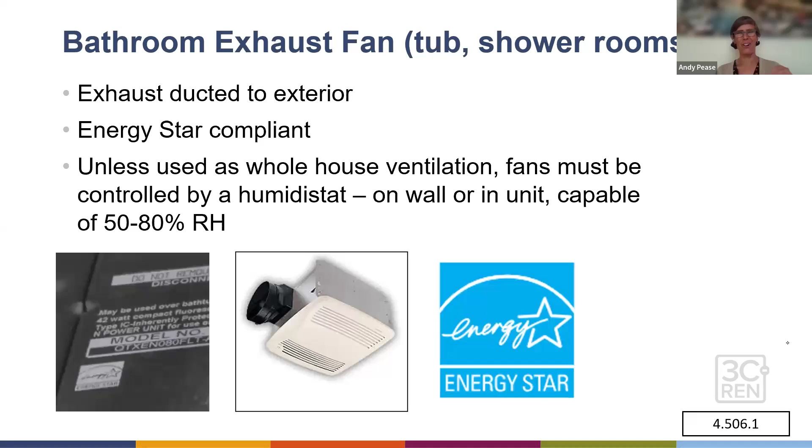In terms of design, again in the residential world, if you're not doing a full ASHRAE model, you need to use ACCA Manual J, D, and S. You need the documentation, drawings, and calculations. We're starting to see, thankfully, jurisdictions asking for a real plan, because otherwise the HVAC installer just goes with whatever size of equipment they typically use - it's usually oversized now, which wastes energy and the owner's funds.

So indoor air quality, meeting the energy code and the regular California code, includes carbon dioxide measuring. Currently it's required to have CO2 monitoring in classrooms, and in 2025 that extends to any classroom - university, private school, everybody picked up on DSA's requirement. Good idea to have CO2 monitoring.

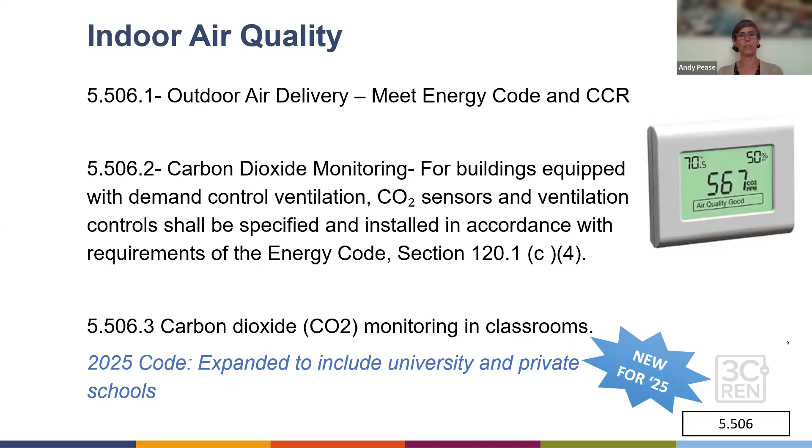Acoustic control wasn't part of green building 20 years ago, but folks realized how impactful it is for quality of life, human comfort, and human health. So there are requirements - you need to have a sound transmission class, that's how we designate acoustic isolation. In this case we're trying to show a level of 40 or better.

You can achieve this with a double wall cavity, or you can use special insulation - there are different ways to achieve that STC rating. It needs to be between tenant spaces, and between tenant spaces and the public.

This bottom right diagram is showing a shell, and then there's a TI. The first TI needs to make sure they're doing the STC correctly, so when the second TI comes in, there's appropriate sound isolation.

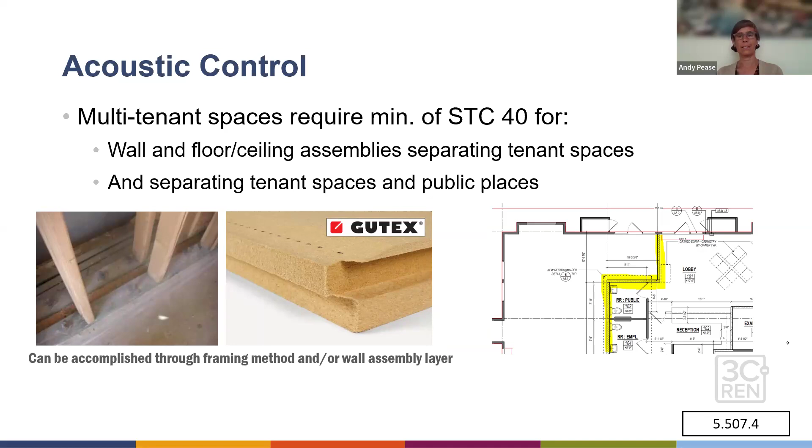Exterior noise requirements get triggered if you're someplace noisy - near an airport, freeway, or train - and you can get the noise contour legend from the local authorities in that area. So again, STC 50 for walls and roof, and windows have a rating as well.

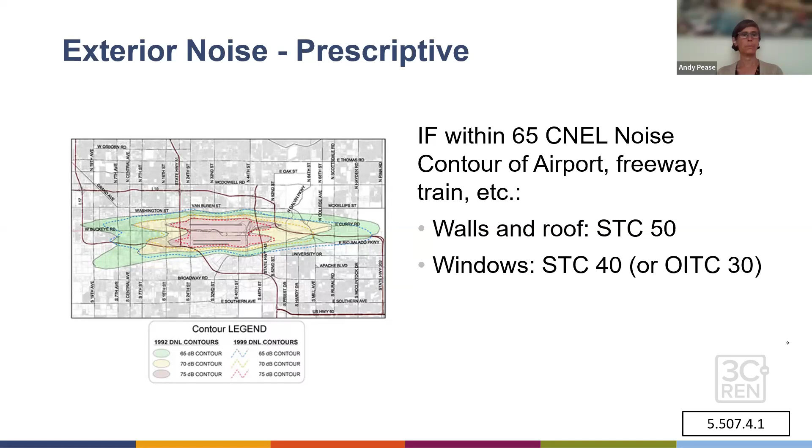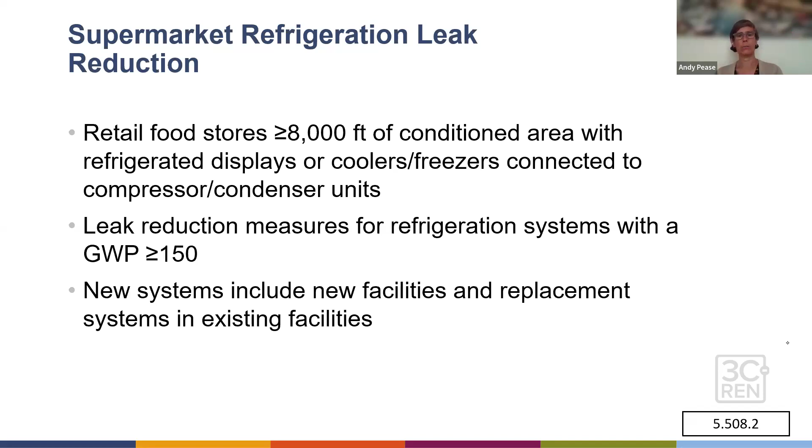Ozone depletion and GHG reductions - we've been on that track a long time, thankfully. The code cycle before last added supermarket refrigeration leak reduction, so we're trying to make sure we're not leaking refrigerant in these high impact areas. We're going to see more attention paid to leak reduction in refrigerant as that scales to different systems.

Okay, and then we are in the 'other stuff' category of CALGreen - those were the mandatory measures. So just kind of some quick hits on what the rest of the code has.

Chapters 6, 7, and 8 - chapter 6 has current links to all the references, and yay, they keep that current, so that's pretty helpful. Chapter 7 has special inspections, with some code cleanup coming in the next cycle, which we appreciate. Chapter 8 has a whole bunch of handy forms for calculating a water budget, so if you don't want to comply prescriptively with those water thresholds, you can demonstrate that you go higher in one area and lower in another, and it all comes out to that water budget.

Construction waste management has a template. That life cycle analysis has a template. Commissioning, lots of templates and more. So kind of a useful section there.

And then the tiers. So as we mentioned, within each category, there's a whole section of voluntary electives. A jurisdiction might say tier 1 isn't required, but if you get tier 1, you can do either additional floor area or expedited plan check at tier 1 or tier 2. So if you do all of tier 1 or all of tier 2, you have to hit some new prerequisites within each section, and then you choose some electives. Again, similar to LEED in that way.

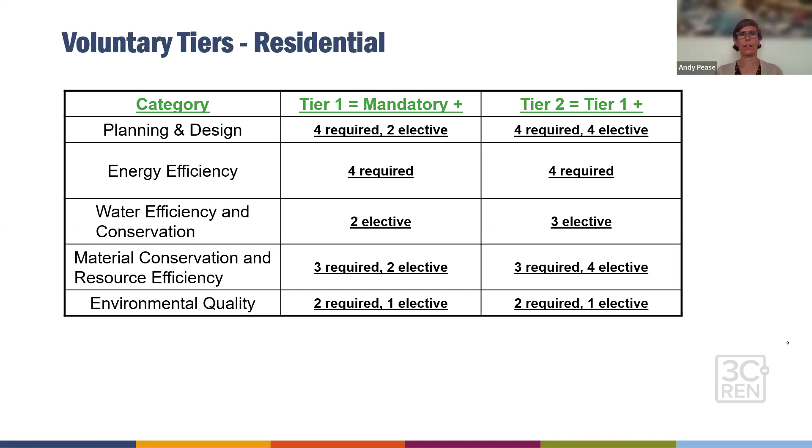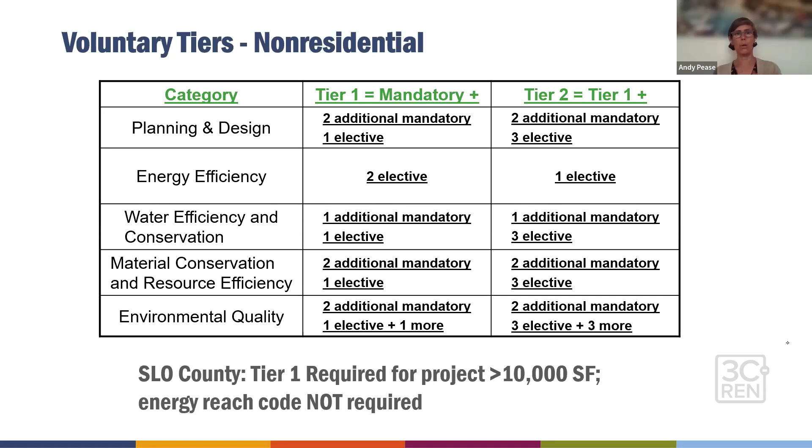In the residential section, these are the requirements. Non-residential, similar—there's mandatory measures and then electives within each category. SLO County requires tier 1 for projects over 10,000 square feet, but then they waive the tier 1, tier 2 requirement for improved energy performance because they didn't want to go after the reach code with the CEC.

Here's an example of a tier 1 elective: bird-friendly building design. We see birds flying into buildings, but there are some reasonable strategies to help birds recognize that glass is not a tree, so they won't fly into it. They have some options—you pick one or two of these to apply to your building, and then you meet that tier. The other thing about the tiers, and why we wanted to highlight this, is it was added recently, and it makes us think, I wonder if that's going to fold in and become a mandatory measure at some point. So the tiers are definitely a hint to what's around the bend for mandatory requirements.

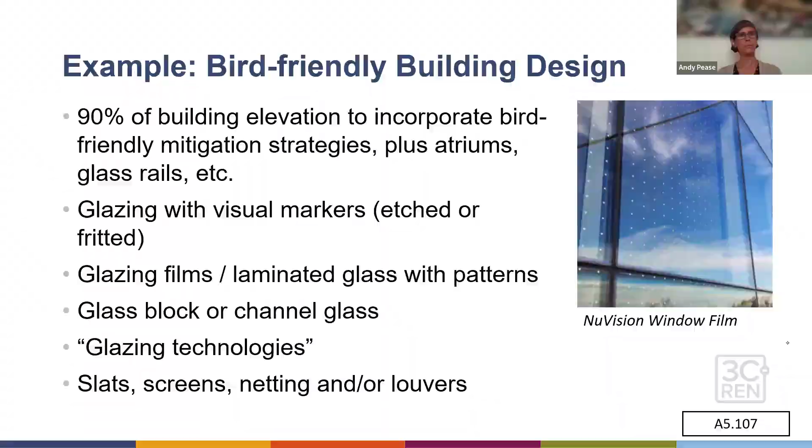And with that, we will wrap up and be able to answer your questions.

We do want to note again that we have a code coach. It's totally free—we'll talk about any of the energy code or any of the CALGreen code. You just go online, fill out your question, or you can call. It's also available in Spanish, so if you have contractors, or if you yourself would be more comfortable in Spanish, we have a code coach who can respond in writing or by text.

Do use that. We put in a couple other CALGreen resources. One is the AIA checklist that you can just go ahead and access. The California Energy folks—the same ones who do Energy Code Ace—have a codes and standards page with a whole bunch of other resources, including a link to the code itself, and all the local reach codes are in there. That's pretty handy, especially if you're working in a new jurisdiction, to know what's there.

Danica will be your point of reference if you have any questions about your AIA or your learning units. She'll send you the recording. We have a survey available now—we'd love for you to fill it out because we really need to be able to improve and meet whatever requests you have.